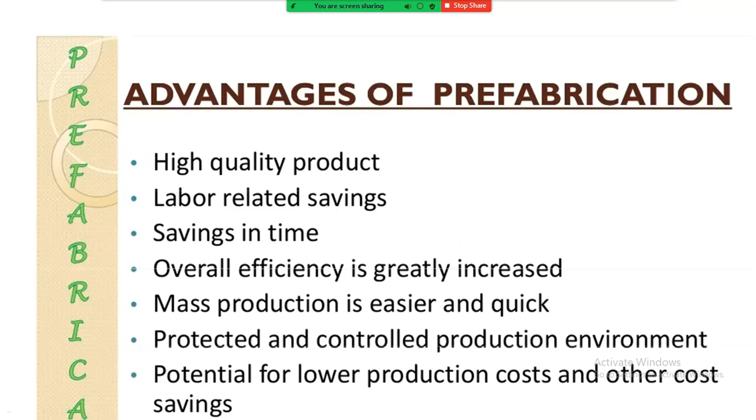First, advantages of prefabrication: first, high quality product, labor related saving in time. Okay, then, sorry. Overall efficiency is greatly increased. Mass production is easier and quick. Protected and controlled production environment. Potential for lower production cost and other saving.

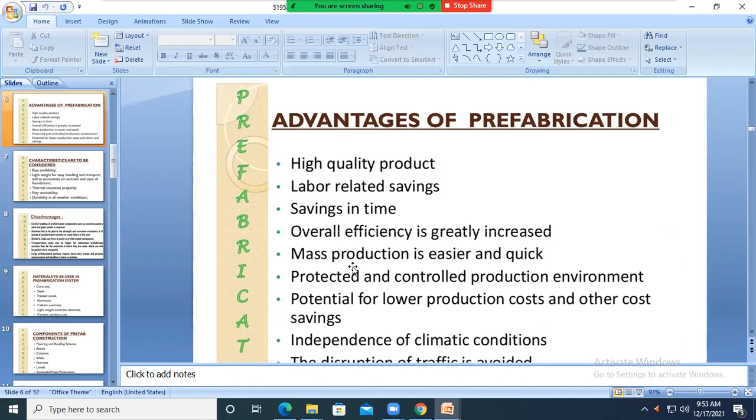Wait. Then independence of climate condition, and the disruption of traffic is avoided. First main advantage of prefabrication: the speed. Main advantages of prefabrication are speed, then high quality, then saving.

Speed: the construction period could be reduced by about 40% for single storey buildings and 25 to 40% for multi-storey buildings. Second is the reduction in cost: with assured demand, the cost could be reduced by 15 to 20%, if not more. Economy lies in the framework and shuttering, labor, material, etc.

Okay, then this is the reduction in cost, and then high productivity means better organization, facilities, supervision, and labor specialization could result in high productivity. Then disciplined use of scarce materials: by adopting design methods involving optimized theories, the consumption of scarce materials like cement and steel could be minimized.

Strength and quality of concrete: with effective control over the process of manufacturing, it becomes possible to improve upon the strength and quality of concrete. Then uniformity in quality: uniformity of quality of product can be assured by using mixing equipment and vibrating tables, etc. And high working stress: due to the quality control, higher working stresses of concrete can be adopted for design purposes, resulting in saving of concrete.

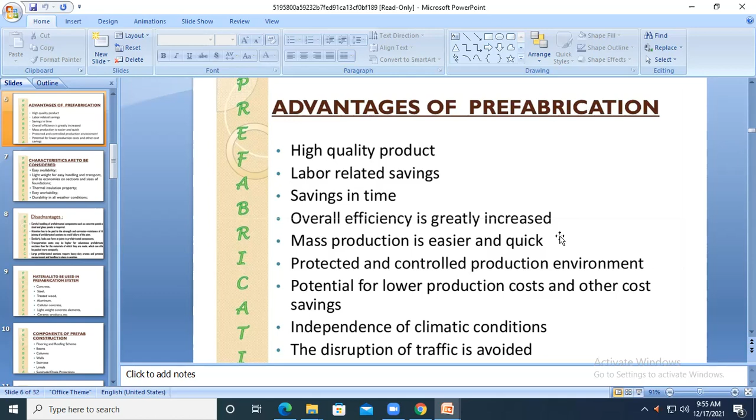And last, independence of climate condition, disruption of traffic is avoided, then ensures a high degree of safety. Then improvement in working condition for the laborers. The improvement in working condition of labor is also achieved because they are granted minimum amenities by factory rules. Okay, this is the main part for the advantages of prefabrication.

Then disadvantages of prefabrication: careful handling of prefabricated components such as concrete panels or steel glass panels is required. The method of analysis and design of prefabricated structures and the components are the same as in the case of conventional construction, but the following main points of system approach need further consideration.

Prefabricated construction means standardization, then principles of structural design, meaning loading and type of connection. The requirement of good connection is the main disadvantage of prefabricated construction. Then last, waterproofing, installation and finishing are the main parts of the disadvantages of prefabrication.

Careful handling of prefabricated components such as a concrete panel or a steel glass panel is required. Then second point, attention has to be paid to the strength and corrosion resistance of the joining of prefabricated sections to avoid failure of the joint. Then similarly, leaks can form at joints in prefabricated components.

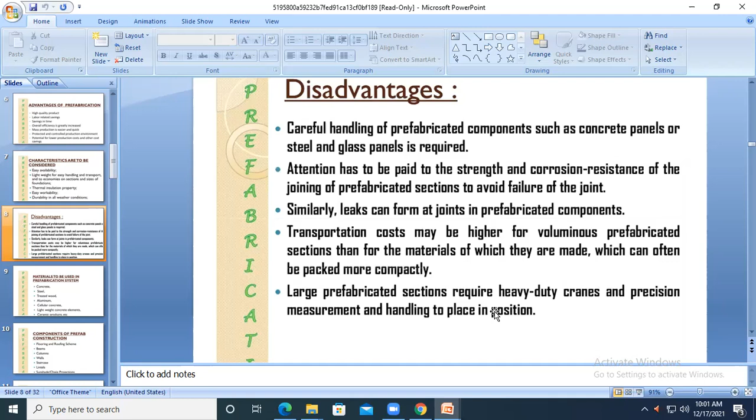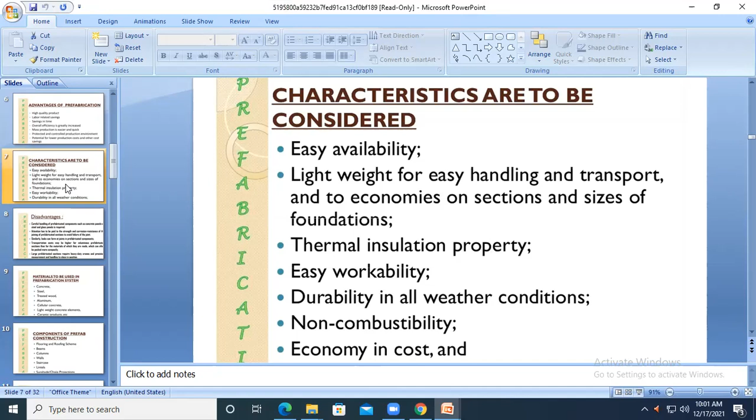Okay. Main characteristics to be considered for prefabrication: easy availability, light weight for easy handling and transportation, economy in section and size, section and sizes of foundation, thermal insulation property, easy workability, durability in all weather conditions, non-combustibility, economy in cost and sound insulation.

Okay, now India. In India, we have already gained sufficient experience to build upon in the field of prefabrication. Some factories have been set up, including the Hindustan Housing Factory, HHF, in New Delhi by the government for manufacturing precast components and construction of fully prefabricated houses, with technical assistance from research and development, financial and